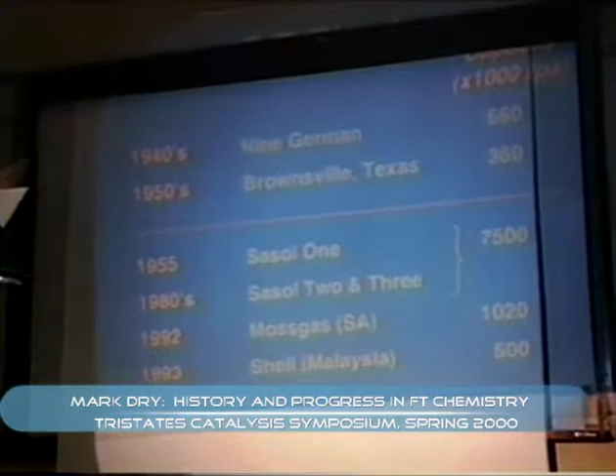Let's start off by looking at some past and present Fischer-Tropsch plants, commercial plants only. In the 1940s, we had 9 German plants operating, and in the early 50s there was a plant in Texas, Brownsville, which operated for a few years until it was shut down because the price of methane went up. The 9 German plants were very inefficient and were simply shut down after the Second World War.

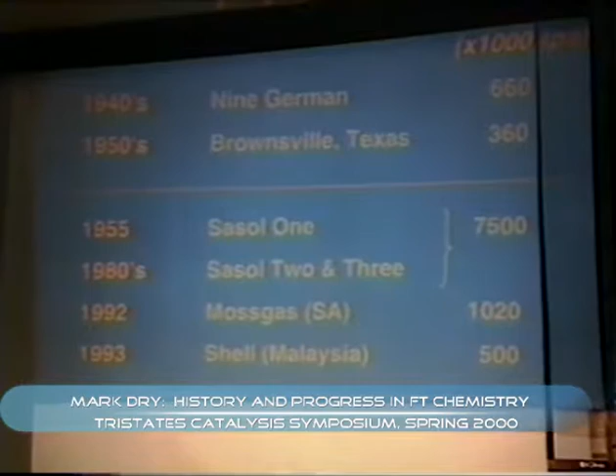Then the currently operating plants: the Sasol plants, and the Mossgas plant in South Africa. The Mossgas plant, incidentally, has nothing to do with Sasol - it's a completely independent unit; we sold them some technology, and that's all. Then, of course, we had the Shell plant in Malaysia, which operated from 1993. So those are the current plants.

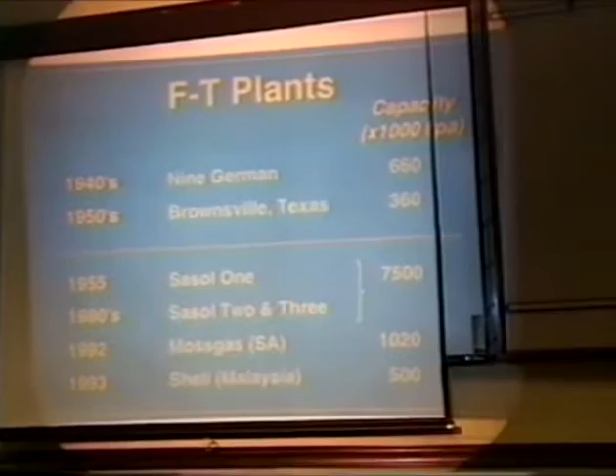If you look at the capacities, the 9 German plants jointly produced a capacity of 660 kilotons per annum, whereas the 3 Sasol plants - mainly these 2 big plants - now have a capacity of 7,500. So things have increased over the years.

Now, the decision to build a Fischer-Tropsch plant depends on several things. Local politics is very important, as is the price of crude, or the perceived price of crude, and the perceived reserves of crude oil. All these factors are involved when you decide to build a plant. It can be a pretty tricky operation.

Let me tell you about the Sasol 1 plant, the early plant constructed in the early 1950s. At that time, after the Second World War, there was a worldwide perception that crude oil reserves were running dry. There was work done in America and in Germany, all on the Fischer-Tropsch process. Based on this perception, it was predicted the price of crude would rise. Therefore, in South Africa, since we had huge coal reserves and the price of crude was expected to climb, they decided we could put up a Fischer-Tropsch plant based on coal.

It wasn't politics at that stage - politics was only in the background, because at that time there was no talk of oil embargoes. And so we built the plant.

But in the middle of this construction, while they were actually building the plant, the huge oil reserves in the Middle East were discovered, and this flattened the entire argument. The price of crude did not rise, so Sasol 1 on paper was a bit of a flop. However, what saved Sasol 1 was the fact that they made high-priced linear waxes which sold very well, and we limped along for several years.

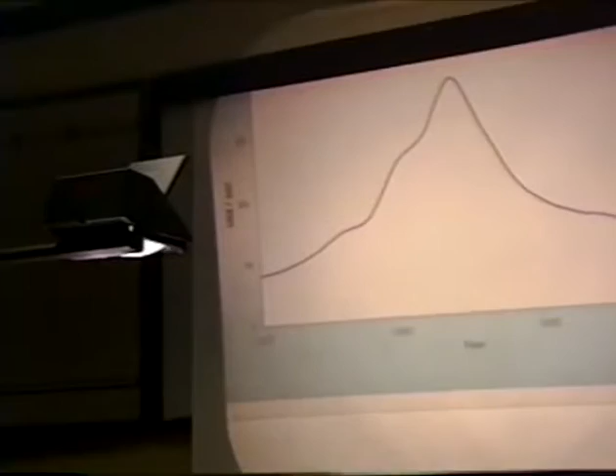Okay, but now let's look at the price of crude oil as it changes over the years - this is the vital factor. Long ago, in the Sasol 1 days, we're back here, the price of crude was $5 a barrel.

Very poor business. But in the mid-70s, as you all know, we had the Middle East oil crisis again, and the price of crude started going up, and Sasol decided by then they had developed all the technology they needed, and they decided to build new plants. As luck would have it, when those two plants came on stream, the Sasol 2 and 3, they hit the jackpot. The price of crude was over $30 a barrel. So that at least was a success story.

As you can see, the price of crude has dropped again. In 1992, the Mossgas plant was designed here, and it came on stream there. Of course, that was a bit of a flop. And the Shell plants followed soon after. So whereas the Sasol plants hit the jackpot, the Shell and the Mossgas plants did not. But look what's happened again just in the last year - it's shot up all the way to $30 a barrel, which once again has sunk.

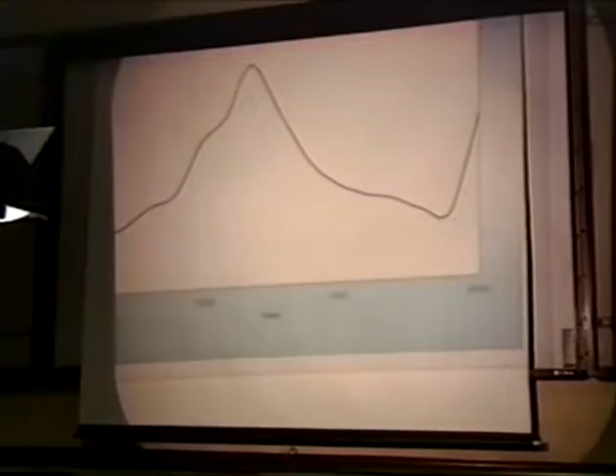What I'm trying to demonstrate is how tricky it is to decide to build or not to build a plant. Incidentally, on a personal note, it's also tricky to write about these things. In fact, a year or 18 months ago, I wrote an article saying that at the current price of crude, $10 a barrel, it was completely unviable. And by the time it was published, the damn thing was $30. You can never know.

Right, what is the cost breakdown of building a plant?

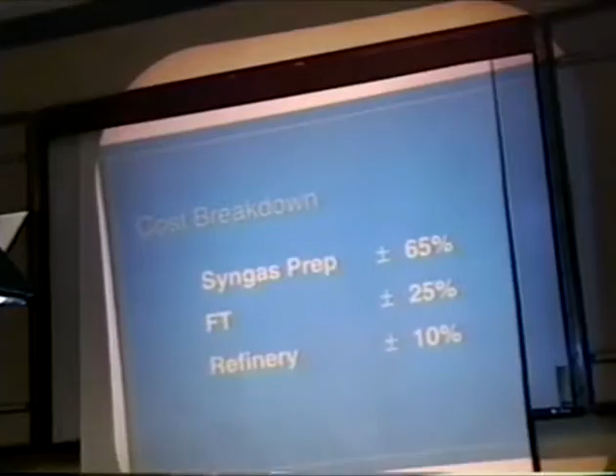The expensive business of building a plant is preparing the synthesis gas. That accounts for 65% of capital as well as running costs. The Fischer-Tropsch section itself, where you convert the synthesis gas to oils, accounts for 25%, and finally the refinery is only 10%, where you upgrade the fuels to make acceptable gasoline and diesel fuel. So you can see, besides the price of crude, the syngas is a very important aspect here.

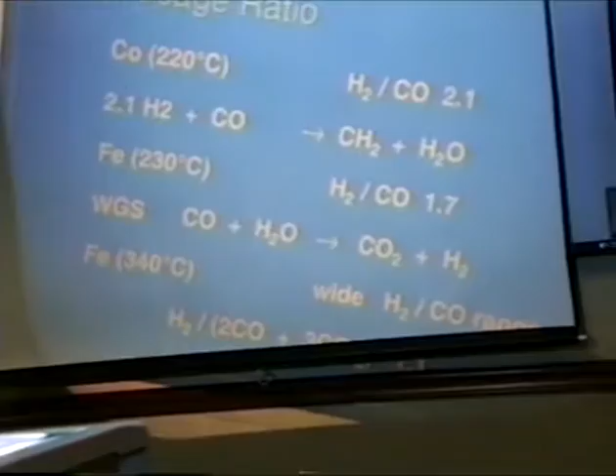Now because the syngas is so expensive, it's obviously important that you utilize it as efficiently as possible. This means the gas you feed to the reactor should match the so-called usage ratio that we just explained. Take the example of cobalt - the usage ratio is 2.1. This means 2.1 hydrogen reacts with the CO to form the building block CH2 plus a molecule of water. In other words, you need to feed this ratio so that you can utilize all the gas, because it's expensive to make.

In the case of iron catalysts operating at 230, the usage ratio is lower. This is because of the water-gas shift reaction, which consumes some of the CO you feed, reacts with some of the water, the water vapor you produce, and makes CO2 and additional hydrogen. So overall the usage ratio is 1.7. Ideally, you would like to feed a 1.7 ratio to an iron catalyst operating at low temperatures.

But at high temperatures, the water-gas shift is very reactive - it goes rapidly in both directions. So you can either make CO2 or consume CO2 via the reverse water-gas shift. In the case of the iron catalyst at high temperatures, as long as your feed gas ratio of hydrogen divided by twice CO plus 3 times CO2 is about 1.1, you can theoretically consume all the gas you feed. But bear in mind, in a practical reactor, the pass conversion isn't 100%, so in practice you either have 2 stages or a recycle operation. But in practice you can consume all the gas.

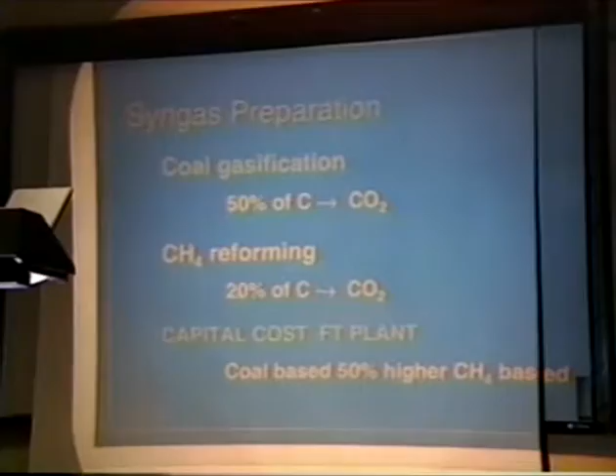Now, in the preparation of syngas, we have two choices basically: you can gasify coal or you can gasify methane. Either way, the process is highly endothermic - this means you need to burn part of your feedstock to generate the energy to drive the reactions. In the case of coal gasification, 50% of the carbon in the coal ends up as CO2 - it seems terrible. In the case of methane, it's much better - only about 20% ends up as CO2.

Now the inevitable result of this is that your carbon efficiency is poor, but as I say, that's simple chemistry - you can't get past that. The result of the coal versus methane comparison is that in the case of a coal-based plant, the capital cost is 50% higher than in the case of a methane-based plant.

We'll very rapidly give you some idea of the various options. This is the coal gasification procedure. You have coal being fed to the power plant with water, which generates steam. The rest of the coal goes to gasification, plus steam, plus oxygen, and this is where the gasification process occurs.

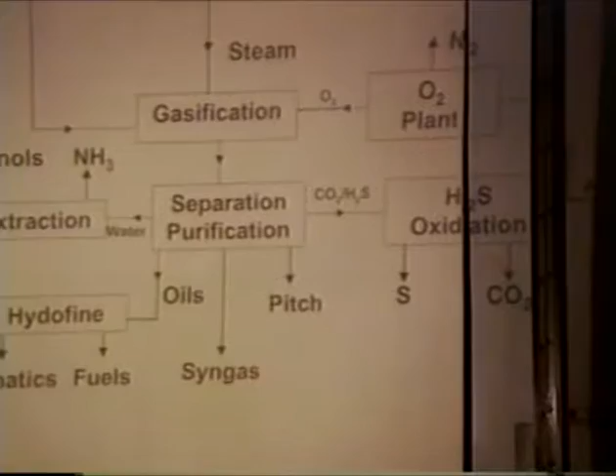Because coal is hardly a clean feedstock, you get an amazing amount of byproducts. For instance, a lot of H2S is produced, which you have to selectively oxidize. You can't let it into the atmosphere. So you make pure sulfur as a product.

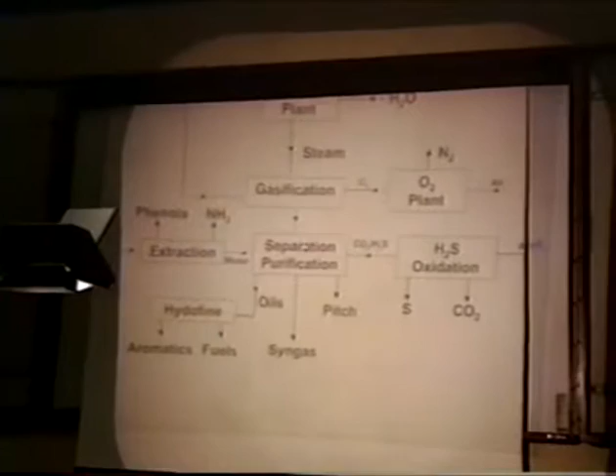You also generate a lot of pitch and aromatic oils, which are hydrofined and end up in the fuels, or you sell them as aromatic solvents. Excess steam is passed into gasification, and because of this there's a lot of water which contains ammonia and phenols. You have to purify this water, which can then go back into the cooling water system.

What I'm trying to get at here is a complex plant. There are lots of byproducts, but you can sell all of them. When you operate on a large scale, there's no problem selling these byproducts. But of course, it makes the plant very expensive to build in the first place.

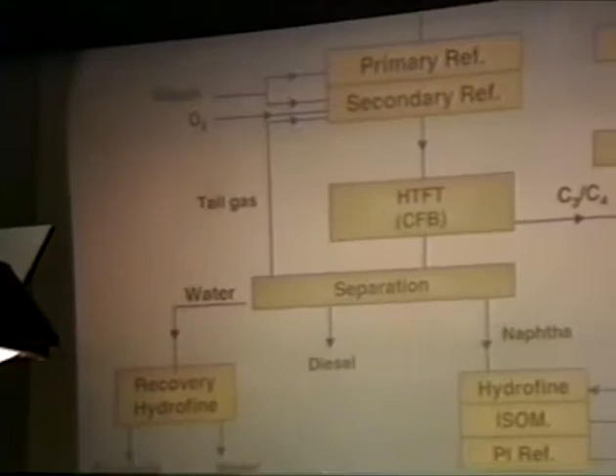Now, in the case of methane, the situation is much better. This is the flow diagram of the Mossgas plant in South Africa. They start with natural gas, with two-stage reforming, both catalytic - primary reformers, multitubular, followed by secondary reformers - and then go to the Fischer-Tropsch process. I won't go through all the plant, but you separate the products.

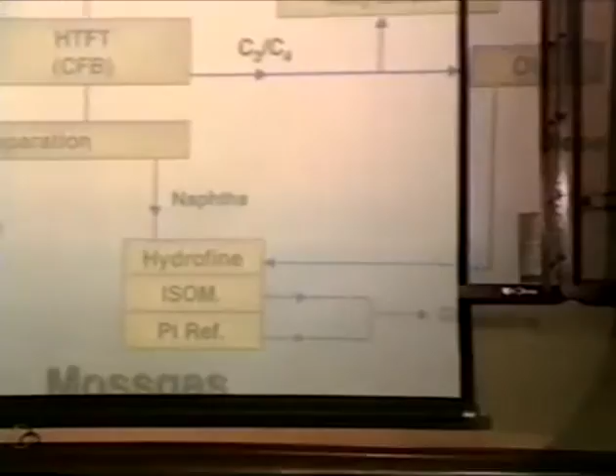The light end, which contains unconverted tail gas together with methane and the C2s and other light ends, is recycled to the secondary reformer and reconverted to syngas, so all the syngas is consumed. But obviously, it's simply natural gas reforming. There's a bit of scrubbing up too, but it's a much simpler process and therefore cheaper to produce.

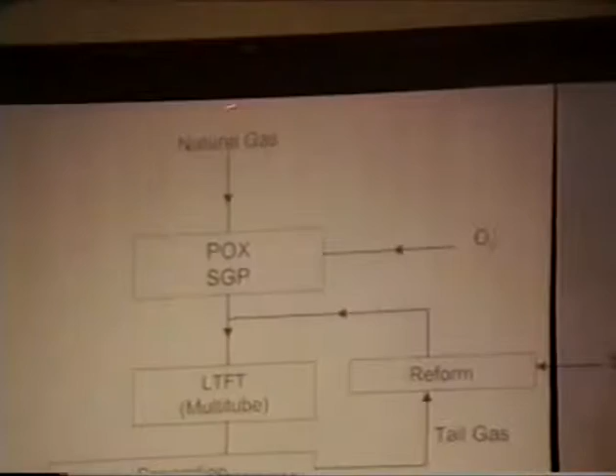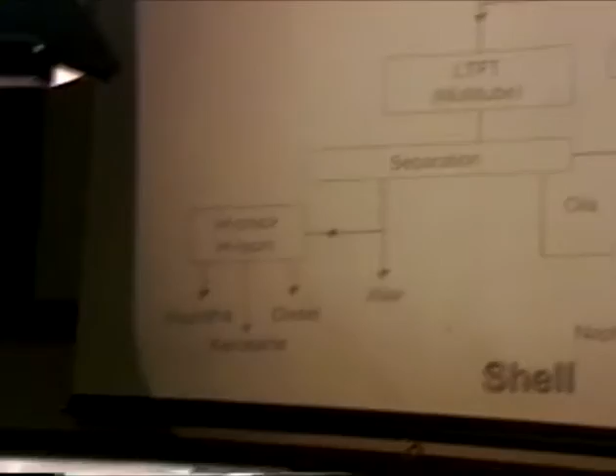The Shell plant in Malaysia is not that different from the Mossgas plant, except that their natural gas is partially oxidized. This is a non-catalytic process, high temperature partial oxidation, and it produces a low ratio gas, lower than you need in the Fischer-Tropsch process. I'll come to a moment how they fix that. So you have the partial oxidation, non-catalytic, going to the Fischer-Tropsch process, plus all the light ends.

In the Shell process, they don't want to recover C4 and lighter. All the methane and C4s are catalytically reformed, producing a higher ratio hydrogen-CO gas, so that the hydrogen-CO ratio matches what you want. You need about 2, and you get it by blending these two streams. So that's the Shell plant in Malaysia.

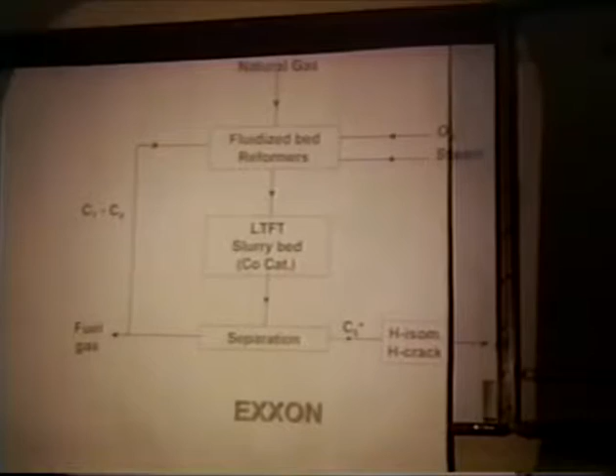Now those are all the current ways of making syngas, but just for interest, let me tell you what Exxon has proposed. They haven't got a commercial plant, but they have run a large demonstration unit. They take natural gas and use a fluidized bed catalytic reformer. The big deal about fluidized beds is that they are very efficient in terms of gas throughput, with very good heat exchange, so you can make a huge amount of gas in the same size reactor.

Because of that, the cost of producing syngas, which is the most expensive part, is apparently lowered considerably. But a commercial plant has yet to appear.

Now, even these figures can change. Let me take you back to the 1970s, when there was a perception that methane was running out. Because Sasol had coal-based synthesis gas, we were asked to run pilot plant tests to convert this gas into methane over a standard nickel methanation catalyst. The runs were very successful - we showed that the gas was okay.

And so Lurgi, who was involved with this, designed a plant here in the States - I think it's Great Plains. The plant operated very well, etc. But of course, methane is plentiful now, so that's another case where things came and things went.

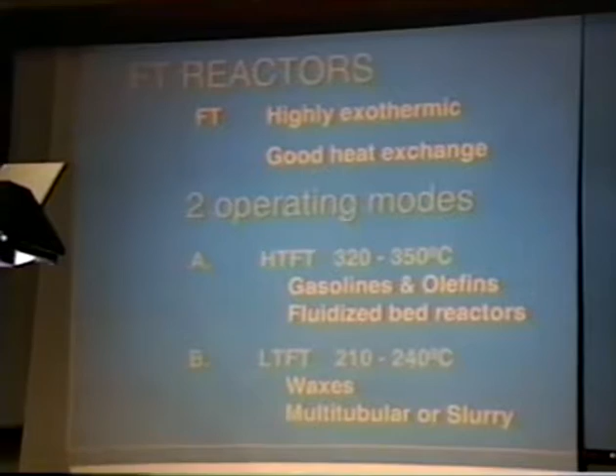In the high temperature Fischer-Tropsch process, we are out to make gasoline and linear olefins - that's the objective, and the best reactors to use are fluidized bed reactors, which I'll be describing. In the low temperature Fischer-Tropsch process, the objective is to make waxes, and the best reactors are multitubular, or preferably the so-called slurry reactors.

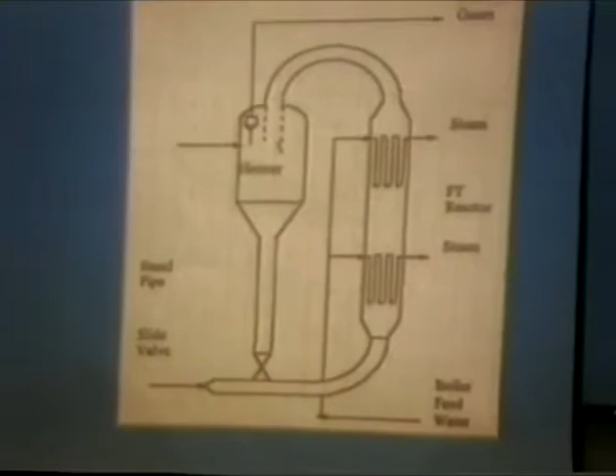Now this is what we call the circulating fluidized bed reactor, or CFB. The idea is you have finely divided iron-based catalyst, with the dense phase fluidized catalyst moving down the standpipe, controlled by a valve. The catalyst is picked up by the incoming gas and swept into the reaction section. The whole mixture is conveyed to a wider section where the linear velocity of the gas drops, so the catalyst is no longer carried and drops down, while the gas and product exit through the cyclones. That's the circulating fluidized bed reactor.

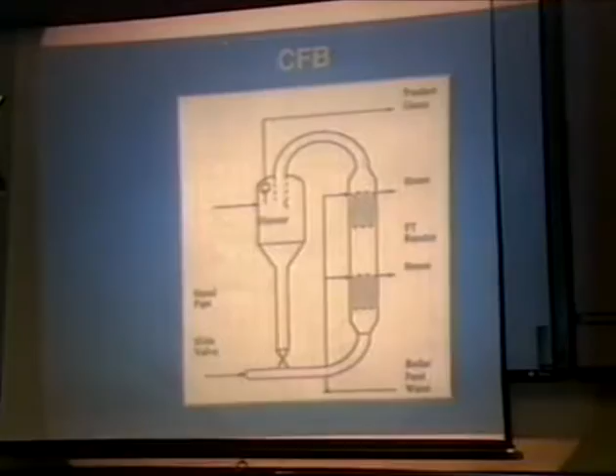These reactors were the original ones built at Sasol 1, and they've operated very well for over 30 years. In fact, the Mossgas reactors are simply bigger versions of these. There's nothing wrong with those reactors, but they are very expensive to operate and build because they're huge.

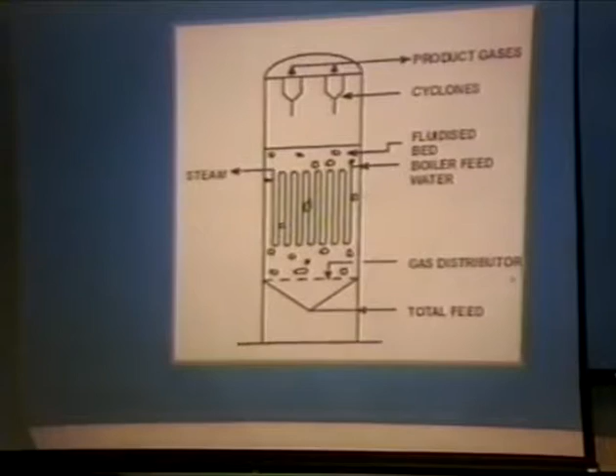A much better option is the so-called fixed fluidized bed reactor. This is just a standard fluidized bed, as you probably know. The feed comes into the bottom through specially designed gas distributors, creating an ebullient, fast fluidized bed, but it's stationary — it's bubbling around but doesn't go anywhere. It's a much wider reactor, so the linear velocity is lower. This makes it a much cheaper and simpler reactor to build.

Now you can say, well, why on earth didn't Sasol put those up in the first place in the 1950s? Let's talk about the development of the FFB.

I've mentioned the 1950 Brownsville plant in Texas ran a Fischer-Tropsch plant. They were, in fact, fixed fluidized bed reactors, about 5 meters ID. Independently of that, Sasol had already decided to build the CFBs — I guess Kellogg's were better salesmen than the other people. So Sasol built the circulating fluidized bed reactors.

Brownsville were operating these, and rumors came back that the Brownsville plant was having fluidization problems. That was true, but they solved the problem. When we heard they had problems, we were of course very pleased — we'd chosen the right reactors.

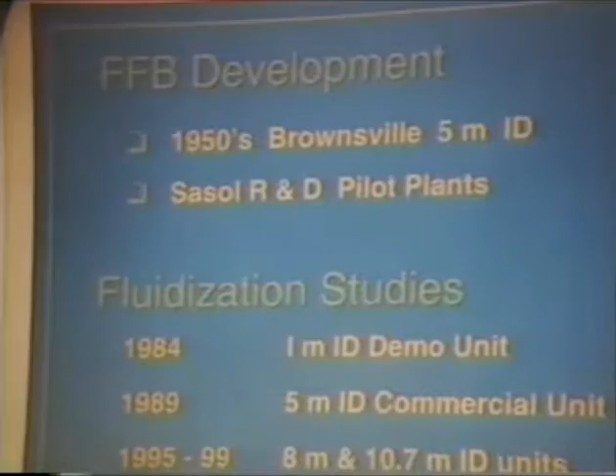As it happens, the R&D pilot plants we used at Sasol to develop new catalysts and investigate process variables were fixed fluidized beds. Admittedly just pilot plants, but they operated very well, and we started asking ourselves, why not fixed fluidized beds? So we went into fluidization studies based on the fact that Brownsville appeared to have had problems.

We studied fluidization together with Badger, and in '84 we built a 1 meter ID demonstration unit, which operated very well. In '89 we put up a 5 meter ID commercial unit — note, the same size as Brownsville. Between '95 and '99, all the large circulating fluidized bed reactors at the Sasol 2 and 3 plants were replaced by large fixed fluidized beds. So, typically, from 1950 it took 35 years before we were back to them.

But they operated very well. We're very pleased with them.

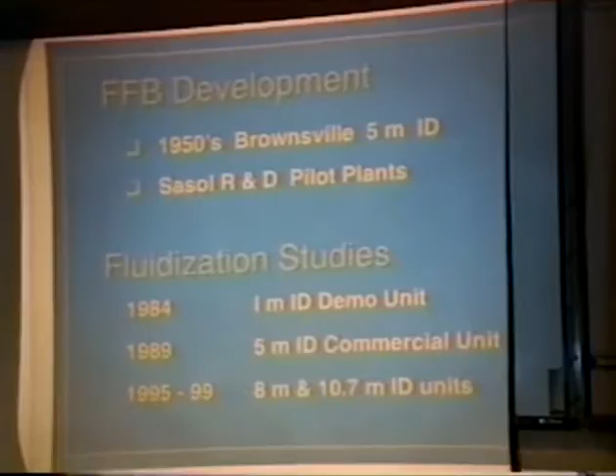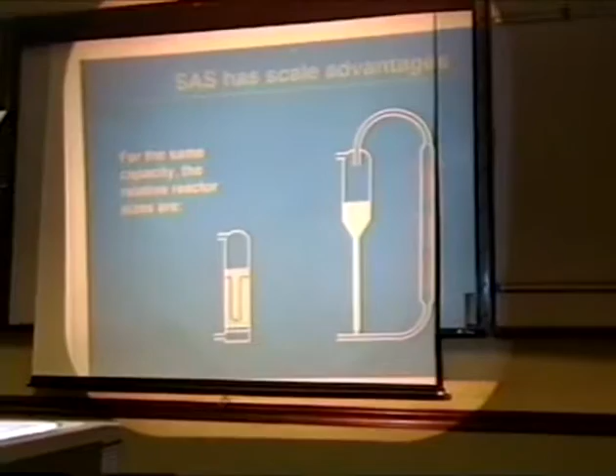Now this gives you some idea — this is to the same scale. This is the fixed fluidized bed, and that's the circulating fluidized bed, with the same production capacity. You can see why this reactor is obviously a better deal price-wise — it's much cheaper to build. So just to rapidly summarize, let's take a couple of key points here.

The fixed fluidized bed is 60% cheaper to build because it's so much smaller. It has lower operating costs because the differential pressure over the bed is much lower, so you don't spend as much energy pumping the gas around. The maintenance costs are also lower, again because of the lower linear velocity.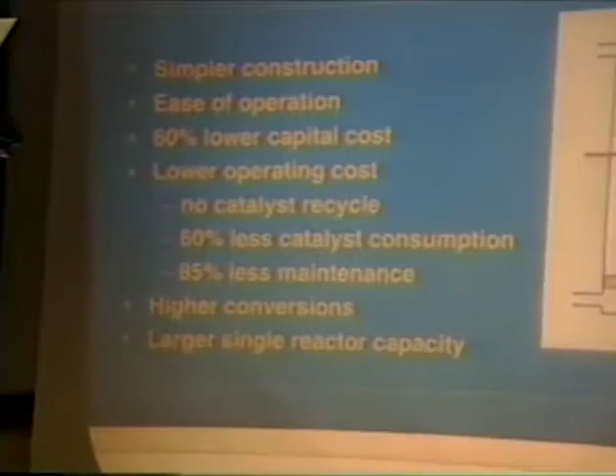In the circulating fluidized bed, you have abrasive iron catalyst traveling at meters per second, and in certain parts of the reactor you need ceramic lining and constant maintenance. In these fixed fluidized bed reactors, there's no need for that — you get much longer runs, so in general they are much better reactors.

And of course they have higher conversions as well, so that's lots of bonuses there.

That's what the reactor looks like. Can't see much, but it's just a great big empty tube full of heat exchangers.

Right, so much for the high temperature Fischer-Tropsch. Let's now have a look at the low temperature Fischer-Tropsch, where the objective is the production of waxes.

The original Sasol reactors at Sasol 1, built in the mid-1950s, were multi-tubular reactors. Those reactors are still there and they're still running. There's nothing wrong with that.

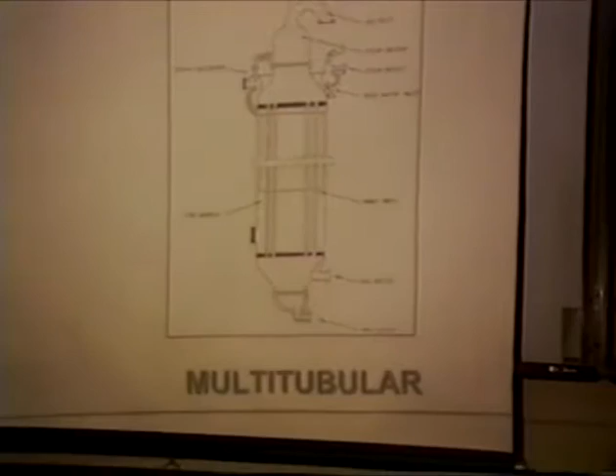But they're expensive to build because they consist of thousands of tubes - in the case of the Sasol reactors, about 13 meters long and about 2-inch ID, with about 2,000 tubes per reactor. It's like a great big heat exchanger with catalyst in the tubes in the middle. So you have catalyst in the tubes, the gas flowing over, and water jackets around to control the temperature.

The Shell reactors in Malaysia are the same type, but because they use cobalt catalyst, their tube diameters need to be much narrower - I guess around 1 inch - and they're much bigger reactors. So they're still very expensive to build. But the point I want to make is these are expensive reactors to construct, but they operate very well.

The alternative is, once again, a fluidized type reactor. I just call it a slurry reactor. It's actually a 3-phase reactor. In this case, you have the finely divided catalyst suspended in liquid wax under the synthesis conditions. So you're passing the syngas through distributor plates, and then you just have a fluidized bed. And you can ask, how come these reactors, after all, were known...

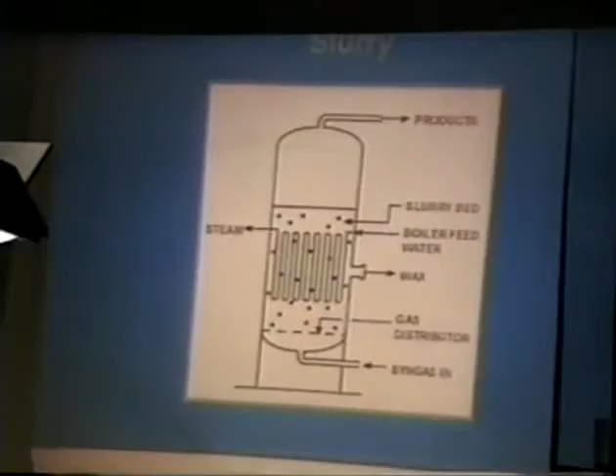German scientist Kölbel played around with this reactor soon after the war. How come it took us so long to build these reactors? The main reason is that because you have finely divided catalyst suspended in wax, and you are making wax, you need a very efficient system to separate the catalyst from the wax. After all, you want to end up with pure white wax, which you do. But the filtration, or separation system rather, is a tricky one, and it took us several years to get that operating. But now it is operating, and it's working very well, at Sasol.

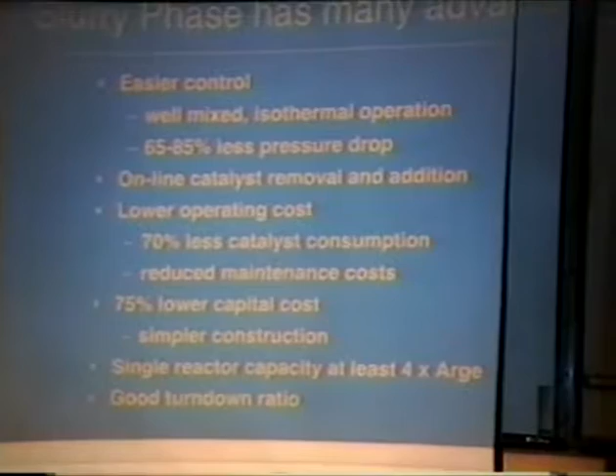And what are the advantages of the slurry reactor over the multi-tubular reactor? I mentioned the cost is 75% cheaper to build. Just think of those thousands of tubes which have to be welded into these massive plates and things - it's a very expensive reactor. Often they just say the weight of the reactor is proportional to its cost.

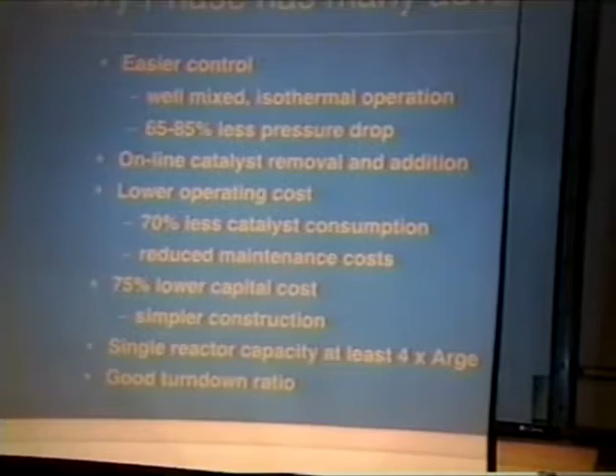A big advantage of the slurry phase reactor is you can run longer times. This is because, with the fluidized bed, you can remove catalyst and add catalyst online, so you don't have to shut down. In the case of a fixed bed, it's a massive performance - you have to shut the reactor down, open it up, get rid of the catalyst, recharge, and that takes you several days.

And this is about the main point. Of course, as I said, it's cheaper online, and also the operating costs are lower, once again because the differential pressure of the reactor is low. It's a fluidized bed - you don't have to force gas through long, narrow pipes filled with catalyst.

Okay, let's talk about the Fischer-Tropsch reaction itself. We've spoken about the hardware, and let's look inside - let's have a look at the chemistry and the kinetics.

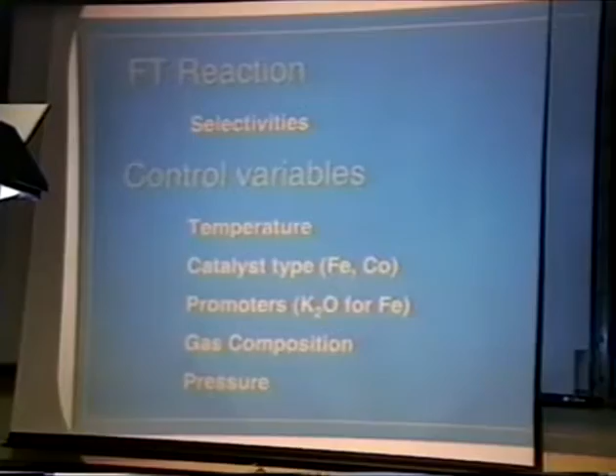I've emphasized that the cost of synthesis gas is very high. So once again, it's important that the selectivity of the process must be such that you maximize the amount of product you want to make. You want to make gasoline, you want to make a lot of gasoline, not just a little. You don't want to make methane, because that's what you're starting with most of the time. And the Fischer-Tropsch process, of course, makes a whole wide range of products, so selectivity is very important.

And how do you control selectivity? The key factors are these: temperature is an obvious one - the higher the temperature, the more methane you make, and that's a bad direction. The catalyst type is important - you can either use iron or cobalt catalyst. Promoters are important in the case of iron - the alkali K2O is of vital importance, in fact it is the key promoter.

For both cobalt and iron, gas composition and pressure also play a role. Those are the variables that influence the selectivity of the process. Let's kick off by looking at the options you have for catalysts.

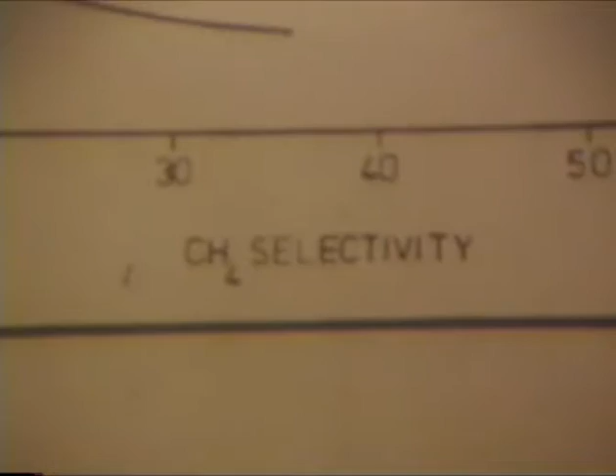For the high temperature Fischer-Tropsch process, I've plotted selectivity of methane, the undesired product, against some other cuts. Here's the gasoline, which peaks just over 40, and then as methane goes up, it falls off. There's the C3, and there's the distillate or diesel cut. You can see whatever you do - mess around with the catalyst, mess around with temperature - somewhere these parts will always fall into place.

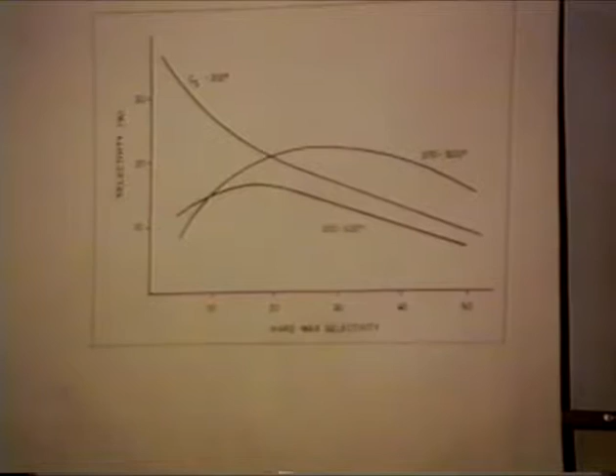Now, how come we have these interrelationships, so neat? It's not higgledy-piggledy - there's some organization in the process somewhere. And this seems to be tied up with the process of chain growth. Let me just spend a minute here.

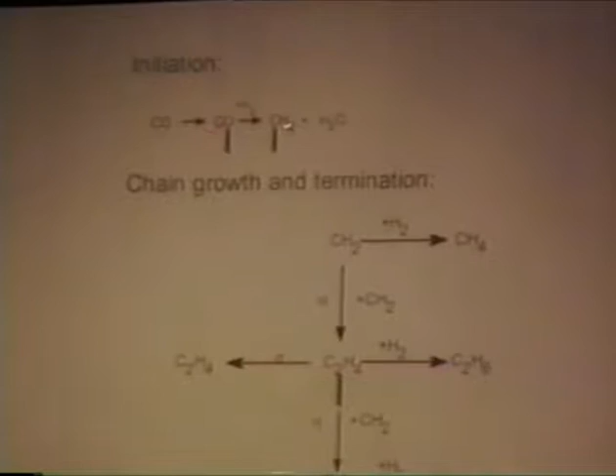You have carbon monoxide adsorbing on the catalyst, and then somehow - I'm not going to go into this - you convert this CO to a CH2 unit, which you can consider the building block of the process. It's polymerization after that. You have the CH2 unit, which can either be hydrogenated to methane, or link up with another CH2 unit, with probability alpha, to form a C2 unit.

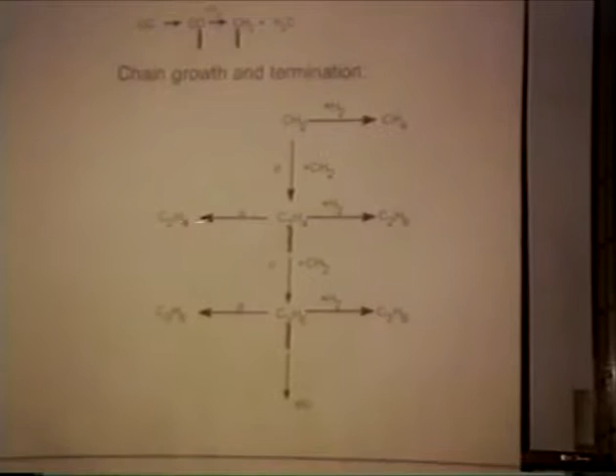Now the C2 unit has three options: it can either be hydrogenated to form ethane, or simply desorb to form ethylene, or it can once again link up with another CH2 unit with probability alpha to form the C3 unit, and so on. So you can consider it a polymerization process of CH2 units.

Now, if it's as simple as that - just a matter of probability of chain growth - you can sit down and calculate the probabilities. You don't need to go through the whole exercise. If you assume the probability changes, then at each probability you can calculate a product selectivity, and this is, in fact, a pure calculation.

You can see I've plotted probability from 0 to 1 against selectivity. Methane, typically, if the probability of chain growth is 0, obviously you only make methane. Then as the probability increases, the methane disappears, and at the other extreme, the hard waxes appear. All other cuts in between methane and the very heavy waxes go through peaks, and you can see the gasoline peaks around the mid-40s, which matches practice.

The distillate or diesel fuel peaks around just about 20, and once again that matches the actual observed phenomena. The only obvious exceptions are that the C2 in practice is lower than the C2 predicted, and the methane is usually a bit higher. But otherwise, there's a surprisingly good correlation between the simple calculated value and the actual values observed in practice.

Now, I'm putting this back up because I want to emphasize that there's not a mechanism. This is simply a polymerization procedure, if you wish. When I'm talking about mechanism, I mean this.

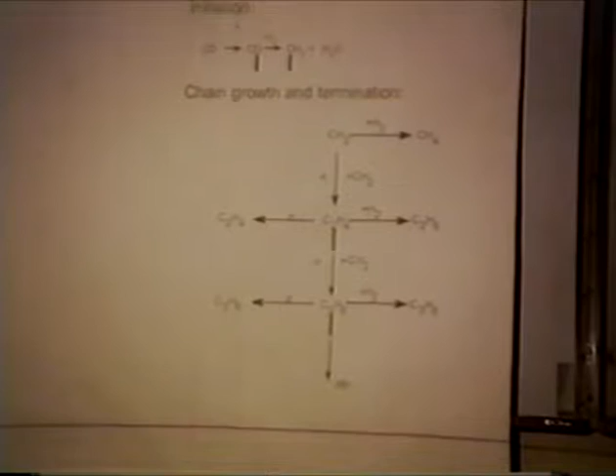How exactly does that CO molecule, on an atomic scale, convert to CH2? What exactly are the process steps? Does the CO dissociate and then this carbon reacts with hydrogen? Or do you first get an intermediate hydroxy process, which then ends up with CH2 with a further hydrogenation step? What is the actual nature of these intermediate complexes? And how exactly do they desorb? What is their particular chemical process involved?

This is what I mean by the basic mechanism. And there's an awful lot of argument about these mechanisms. People have been arguing about them since Fischer-Tropsch started in the 1920s. It's very interesting, but I keep asking myself, is there any point in these arguments? Because I've yet to see anyone decide: right, we have 5 mechanisms, we've made our decision, mechanism B is the right mechanism. Based on this knowledge, we are now going to build a catalyst that has a better activity, a better selectivity, and a longer life. I'm still waiting for that.

Hopefully I'm wrong, but in the meantime, it's very interesting arguing about mechanisms. Now, coming back to the practical side of things, the Fischer-Tropsch plant is normally built at a fixed temperature and a fixed pressure, because it has to match the gas pressures and things like that. So the temperature and pressure have been predetermined virtually.

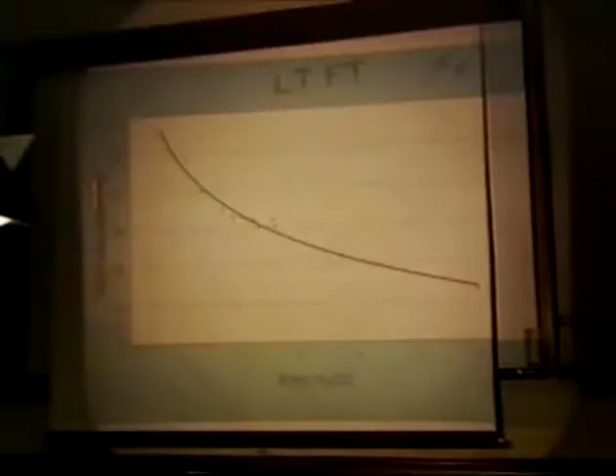This is the case for the low temperature Fischer-Tropsch process, where we're interested in making hard wax as the prime product. Here I've plotted simply the ratio of hydrogen to CO of the gas entering the reactor.

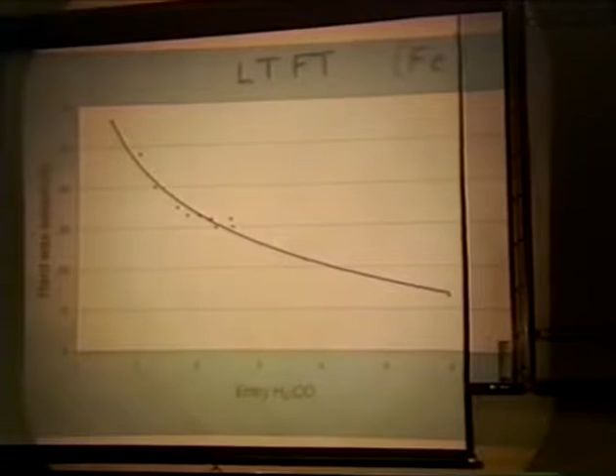You can see there's a nice plot here. The pressure has been varied from 5 bar all the way to 60 bar. We've added water in some cases, in others we've added CO2, we've varied the recycle ratio — the tail gas recycled back to the fresh feed — and we've varied catalyst loadings, so the space velocity has been changed. But in spite of all these variables, at a fixed temperature with a fixed catalyst, all you need to know is the ratio of hydrogen to CO of the gas entering the reactor. It's a clear-cut interrelation.

That's for iron catalyst. For cobalt catalyst, incidentally, it's more or less the same, except that up to about 20 atmospheres, the methane decreases with increase in pressure. The iron catalyst, however, is independent of pressure in the low temperature process.

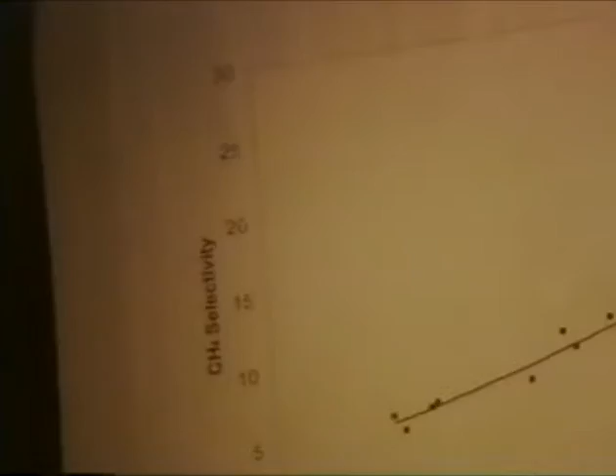For the high temperature process, it's much more complex. Here I've used methane as a parameter because this is the undesired product, and this is the factor I'm using at the gas entrance. Now it looks much more complex. If you take the simple hydrogen to CO ratio of the gas entering the reactor, it's a very poor correlation — in fact there is virtually no correlation.

Once again, here we varied the pressure from 10 bar all the way to 80 bar. We've added water, we've added CO2, changed the recycle ratio, changed the gas loadings and everything. You can see this factor, for what it's worth, seems to give a reasonable correlation — this is the entrance gas composition. Because the hydrogen is to the power 0.25 (we could make it 0.5, it doesn't really matter much, it's a fractional power), and the CO is to the power 1, you can see the pressure has an effect. In fact, if you increase the pressure in the high temperature process, the selectivity does change. This does not happen in the low temperature process.

So this is the gas factor controlling selectivity. These are purely practical things. We can rationalize them — you can ask, what's CO2 doing there?

Even though CO2 doesn't influence the selectivity directly, if you keep all other parameters fixed and vary the CO2, you don't see much change. But yet you've got CO2 stuck in it. Why? That's because of the water-gas shift reaction, which will shift things one way or the other. So CO2 has an indirect effect via the water-gas shift, and that's why it's stuck in there.

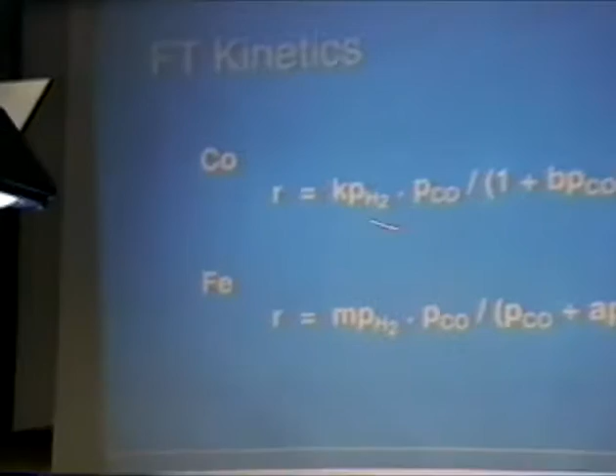Let's look at the kinetics. I'm using two equations that are pretty well accepted by a lot of people. For cobalt, we have an equation that only contains partial pressure of hydrogen and partial pressure of CO, only two factors involved. In the case of iron, you again have the CO and hydrogen partial pressure, but you also have a factor for the water vapor partial pressure.

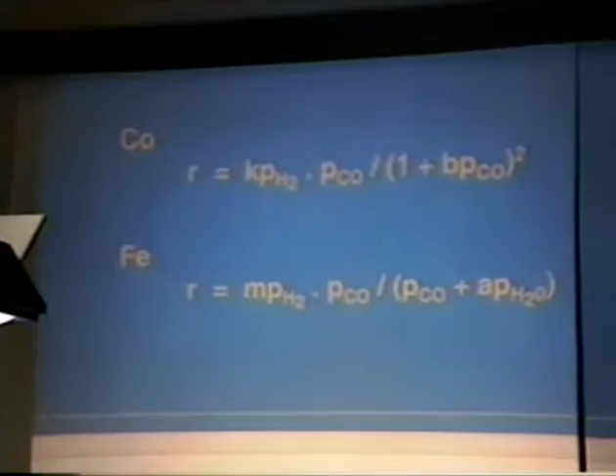Now this fact that there's a water vapor partial pressure here and nothing there makes a tremendous difference. Water is a product of the synthesis, so as you proceed through the reactor you're generating water, the partial pressure of water is increasing, and this means the rate of reaction is going to decrease because of the buildup of water in the system. This will not happen theoretically for cobalt catalysts, according to this reaction. Now that makes a huge difference in the activity.

Let me show you what I've done. I've had to do a bit of hocus-pocus matching here, but the point is you can make different catalysts with different activities. To make the comparison valid, just look at the top blue line, which is the cobalt catalyst operating at about 31 atmospheres, and this is the iron catalyst operating at the same pressure. Down here at low conversion, I've deliberately chosen these parameters.

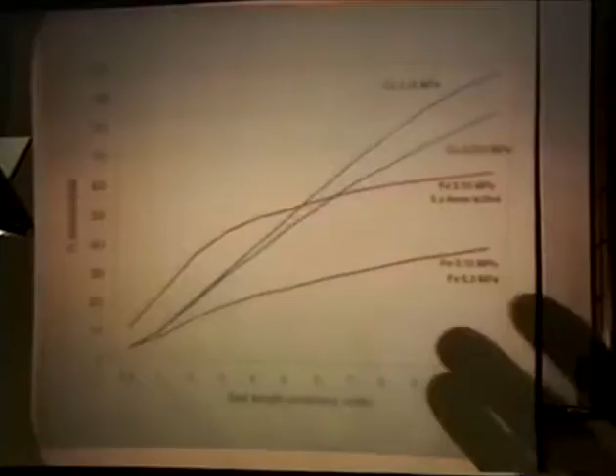The K value there and the M value here—I've adjusted them so that at low conversion you have the same activity. In other words, it's like operating the two catalysts in a differential reactor where the conversion is very low, and then the activity is the same. You produce the same amount of product. So in other words, I'm making the two catalysts as if they have identical activity.

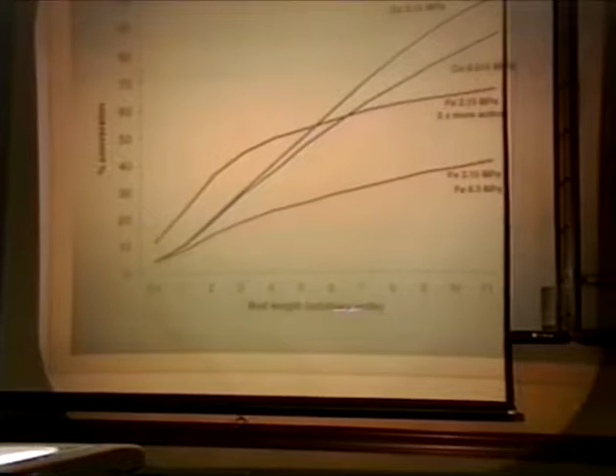Now let's see what happens afterwards. As you build up water vapor pressure, as you proceed down the bed length—these are arbitrary units, don't worry about the inches or feet or yards—the water vapor increases and the rate of the iron sort of bends over. In the case of cobalt, it carries on happily until very high conversion before it starts tipping over.

And you can see, for instance, if you want to operate in this zone, there's a huge difference up here. The cobalt catalyst is capable intrinsically of converting, or being much more reactive, than iron. There's no doubt about it—cobalt is a more active catalyst. One of the big reasons is it's less sensitive to the water vapor pressure.

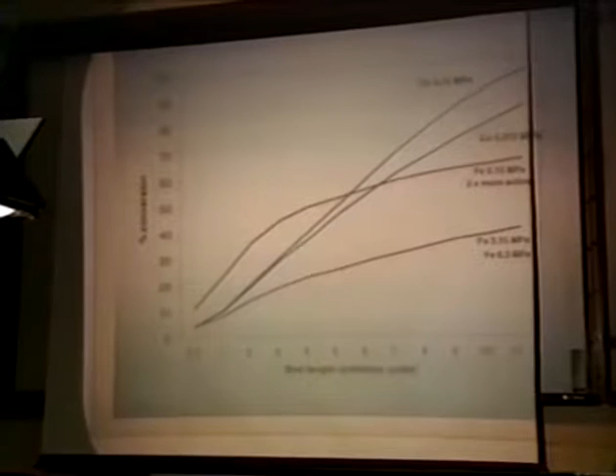But this case here is the ideal case, I want to emphasize this. This assumes no water vapor effect. There's a lot of work that's been done, including at the CAER, that shows water does depress the activity, because cobalt is so expensive you have to minimize the loading of cobalt on your carrier. So you put as little cobalt as possible, say on alumina, and to get decent activity you need high dispersion. This inevitably means very small crystals of cobalt.

But very small crystals of cobalt have different thermodynamics from bulk metal, so the small crystals oxidize. You effectively knock out the very small crystals, so they are not active. In practice, this blue line is the optimum case where all the crystals are just the right size so they don't oxidize, but that's not likely to happen. So I'd guess the true blue line would probably run somewhere more like there. But nevertheless, it will still outperform the iron catalyst.

Let's have a quick comparison between iron and cobalt. All the Sasol commercial units use iron—it's always been like that. But the new Shell plant uses cobalt catalyst, and the new slurry reactors designed for proposed plants are all based on cobalt. Let's just quickly compare them.

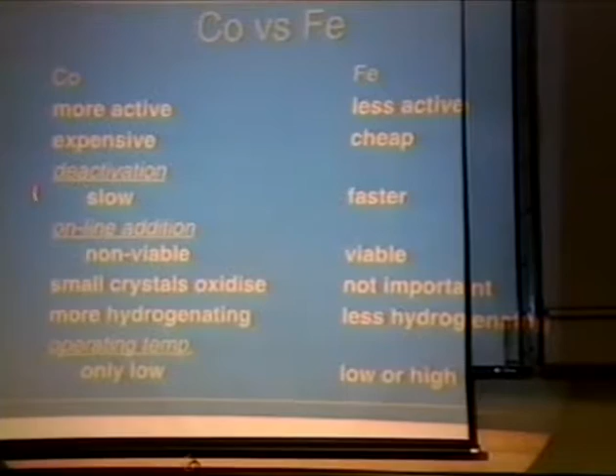Cobalt is much more expensive, but of course it's more active, so that's fine. Cobalt does deactivate, like any other catalyst, but fairly slowly. Iron deactivates faster, but it doesn't really matter because iron is so cheap you can keep charging fresh catalyst into the reactor and keep going at a high conversion.

That makes online addition viable for iron, but less viable for cobalt. I've mentioned that cobalt has a problem of small crystals that oxidize, so it's very important to optimize your particle size on the carrier. For iron, that's not all that important because it's so cheap.

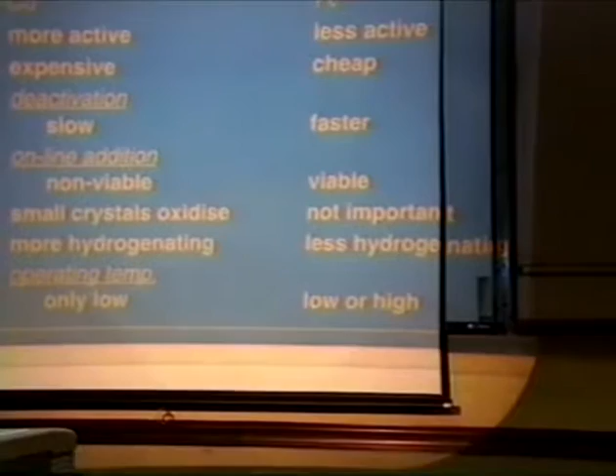You have a huge surface area. You can use virtually pure iron in the catalyst, and you have a big surface area, and you oxidize, so what? You've got plenty of area to spare.

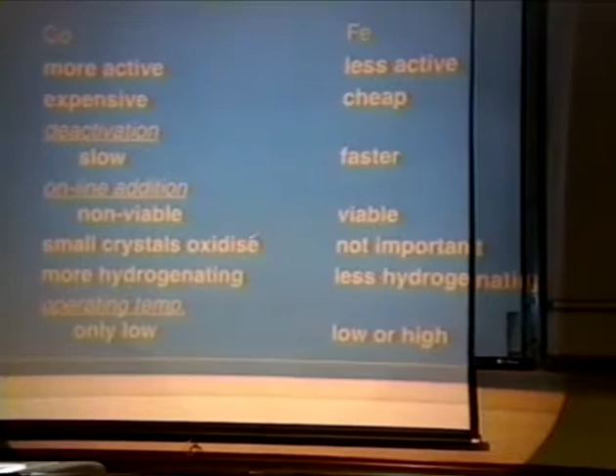Cobalt is more hydrogenating. This means it makes more methane. Because of that, you can only operate at low temperatures. As soon as you increase the temperature, the methane goes sky high. Iron, being less hydrogenating, means you make more olefins, which is nice, but it also means you can operate either at low or high temperatures. So iron has more versatility, but if you're interested in making long chain paraffinic waxes, cobalt is fine.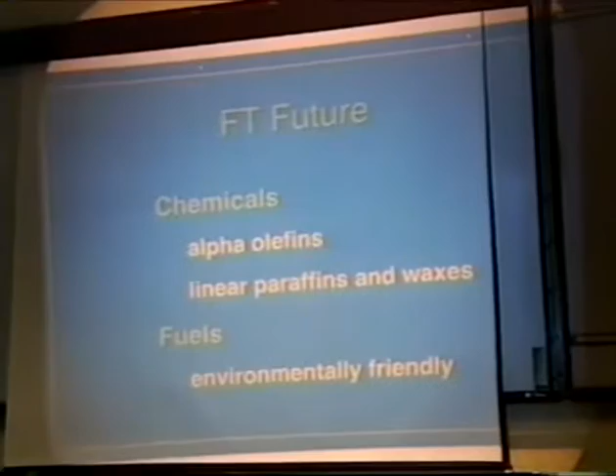What about the future of Fischer-Tropsch? After all, the Sasol plants were built to make fuels. But since the price of crude doesn't look like it's going to stay high, for many years Sasol has been moving towards chemicals. I think currently about 50% of the income comes from chemicals, no longer from fuels.

The big deal about chemicals is that the Fischer-Tropsch process makes linear alpha olefins, which is a very valuable chemical. The paraffins and waxes are also linear, which sell as chemicals. Now, the advantage of Fischer-Tropsch fuels is that they are environmentally friendly, which is a popular thing these days.

Let's have a quick look at chemicals. We don't want to spend too much time here. Take the high temperature Fischer-Tropsch process. Let's compare two cuts, the C6 cut and the C10 cut, just by way of example. The linear alpha olefins are 58% in the C6 cut, and the monomethyl 1-alkenes, still alpha olefins but with one methyl branch, are 24%.

You can extract these linear alpha olefins quite easily by distillation and sell them, and they get co-polymerized with polyethylene to make various grades of polyethylene. Sasol is selling virtually all its C6 linear alpha olefins at very high prices. So that's good business now.

Let's take the C10 cut, which is now being utilized as well. It contains 38% linear alpha olefins and 20% monomethyl 1-alkenes. In other words, when you add them together, you've got 58% alpha olefins, essentially straight chain. These you can convert in the so-called oxo process, the hydroformylation, to produce virtually linear alcohols, which are used in the production of biodegradable detergents. So once again, you're in the chemical business.

Quick look at the fuels. I don't want to spend too much time on gasoline because, remember, the Fischer-Tropsch process predominantly makes linear products, and this is bad news for gasoline. For high octane rating, you need branched products, you need aromatics. Even in a high temperature process, you do make some aromatics, but there's very little benzene - about 0.1% benzene, and total aromatics are 5%.

So that sounds good, low aromatics, but of course the alkenes are far too high. They have to be hydrogenated, isomerized, the heavy naphtha has to be platinum reformed, and then you need to add some ether to boost octane number to make an acceptable, environmentally acceptable gasoline. It's a big performance to make. You can do it, Sasol does do it, but it's not cheap because you have to go through all these downstream production processes.

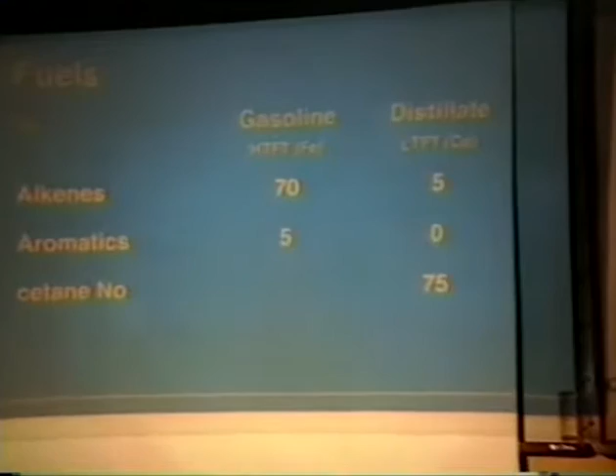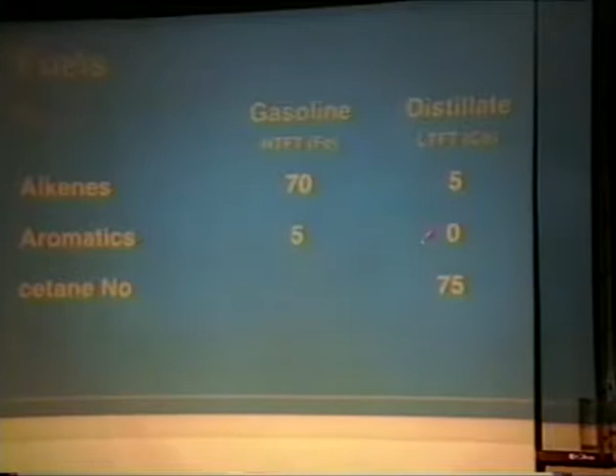A much better bet seems to be the production of distillate or diesel fuel. Take the low temperature Fischer-Tropsch process, operating the slurry bed with cobalt. The total olefins will be only about 5%, so it needs very little hydrotreating to clean it up. There are no aromatics whatsoever in that diesel cut, and the cetane number is a beautiful 75. Remember, you only need about 45 in the marketplace.

Of course, in general, all fuels in the Fischer-Tropsch process are free of sulfur and nitrogen, so that remains a plus in any event.

Now, I want to say, because the diesel is a much better option, let's just concentrate on how do you make high-quality diesel from natural gas.

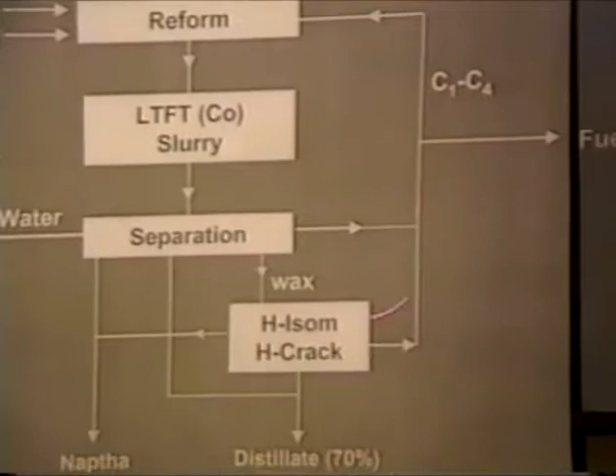Take the natural gas, you reform it catalytically. I've been through that. You make your syngas, you pass it through a cobalt slurry reactor, and you operate this reactor at low temperatures deliberately to maximize wax production. You then take the wax and you hydroisomerize, hydrocrack it to produce distillate.

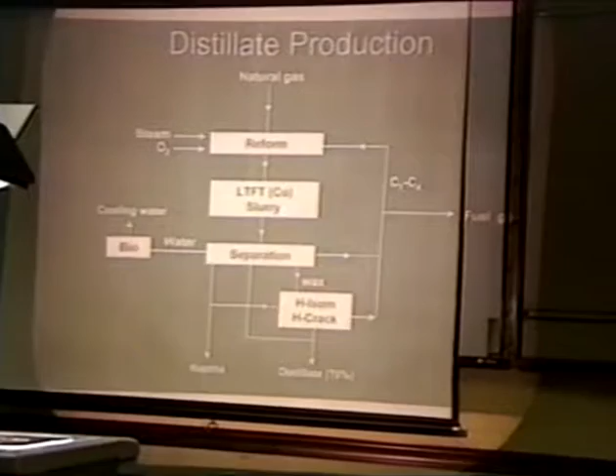You do produce quite a bit of naphtha, but that naphtha is useless as a gasoline because it's essentially straight chain, but it's a beautiful feedstock for thermal cracking to ethylene. You get very high yields of ethylene from it. And then, of course, if you need a purge somewhere, the light ends can be sent off to fuel gas.

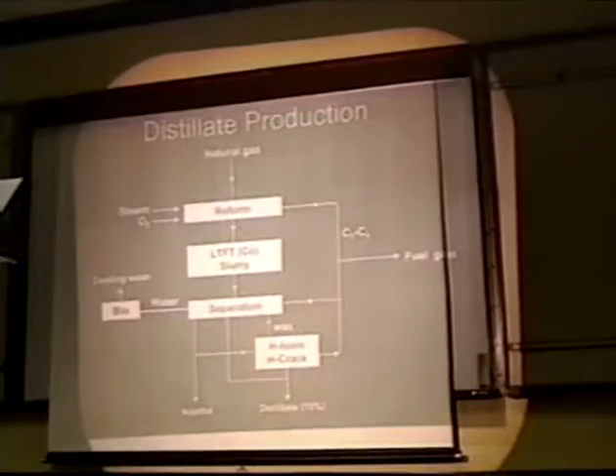Now, this process, in fact, the Shell plant originally built their plant to produce wax, and then they cottoned onto the fact that you could produce the high-quality distillate. So they are operating their plant in two modes. Partly they're making wax, and the other section they are hydrocracking the wax to make distillate.

Now, here's another case where things have reappeared after 25, 30 years. This whole concept is not new. Let me give you a bit of history.

In the early 70s, we at Sasol, in the research department, investigated wax hydrocracking. We found that using the common catalyst like nickel moly on amorphous alumina, which we just took off the shelf as it were, we studied the hydrocracking. We found we could produce a product that was 80% distillate, 15% naphtha, and about 5% light ends.

Now this is not surprising. If you simply do a simple calculation of beta scission cracking, that's what you get. And of course, all the stuff heavier than distillate, because it's mild conditions, you don't get complete conversion. You recycle the heavier cut, and overall, you get 80% diesel. And it has a cetane number of close to 70. So it's excellent diesel stock.

Now, taking you back, we knew this in the 1970s. In the mid-70s, Sasol had to decide—they were busy building Sasol 2 when they realized they wanted to double the capacity, so they had to decide what Sasol 3 would look like. And we very boldly, maybe stupidly, suggested, let's build a hydrocracking plant.

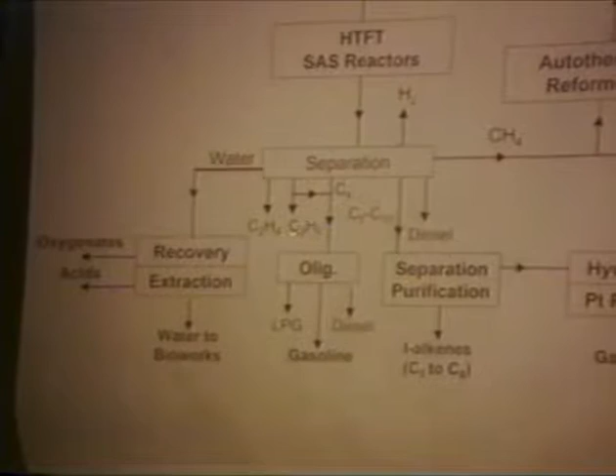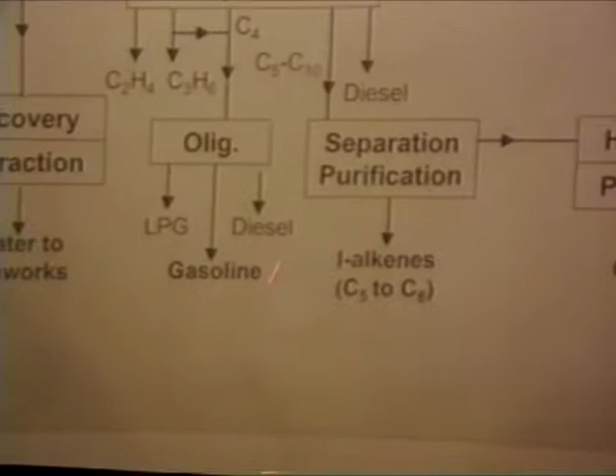So the gasoline is highly branched but also highly olefinic. The octane rating and all that is fine. But the naphtha, now being linear, having extracted the C5 to C8 linear alkenes which you sell as chemicals, the rest is still pretty poor. It's isomerized and then hydrated to iso alcohols. Sasol doesn't isomerize the light end.

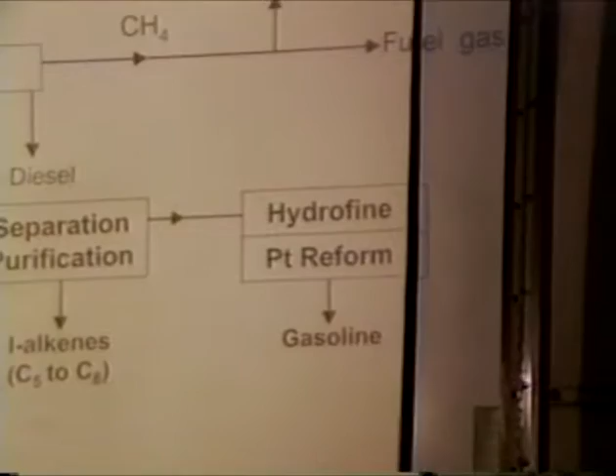Mossgas does - they isomerize the C5, C6, and also make alkylate. But at Sasol, they simply take the remaining heavy naphtha and hydrofine it to get rid of the olefins and alcohols, then platinum reform to make gasoline. They also had MTBE and stuff like that. So you do end up with high octane gasoline, but it's quite a performance to make.

Incidentally, it depends on how things are in the world too. Yes, sure. But what I'm getting at is, in general, you can make acceptable gasoline.

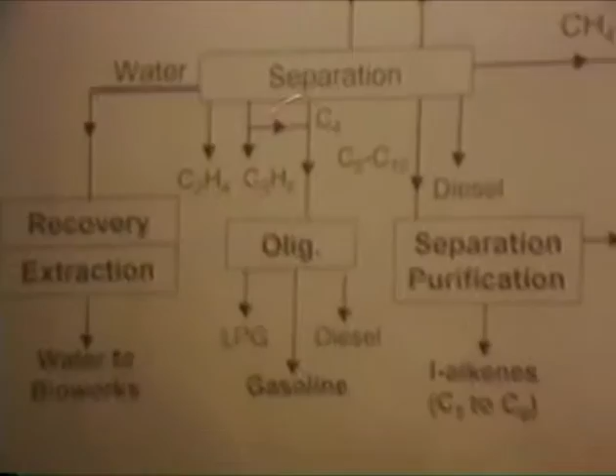Well, they do. Can you vary that a little more so you push the molecular weight distribution even further to the right? Well, the trouble is, the way the plant operates, it's already operating on maximum gasoline selectivity anyway. And even under those conditions, the C3 and C4 total accounts for about 20% of the product. So if you want to make a lot of gasoline, you have to oligomerize that.

Well, I think there's something between your low temperature and your high temperature. Yes, a little different process. Yes, the high temperature is in fact at the peak of gasoline production anyway, so then you simply have to do something with the other cuts. I still don't see why you can't control molecular weight after you complete the conversion - there's some ways to bring that molecular weight back down to where you want it.

Yeah, okay, say I was thinking of some process in between - you can crack the wax, something between making a lot of wax and making these olefins. But you won't be at the gasoline peak then. You wouldn't - the straight run gasoline production would have already dropped down between the two.

Incidentally, I've heard MTBE is not a good thing these days, but since you make a lot of C3, you can of course convert that to diisopropyl ether, which is an alternative. Well, you can make isopropyl alcohol too. Yeah, and that's a high octane component. Yeah, in fact this is interesting - people haven't worked on that very much.

No, in the early days Sasol always put - well, this is another cyclic argument - originally all the Sasol alcohol, about 5% alcohol, was produced in the process. I haven't mentioned that - it's in the water where they can recover the alcohols. But they added the alcohol to the petrol, and there were a lot of complaints because the carburetors of the old cars all got chewed up. So they sold the alcohol to Brazil. But now the alcohol's back in again. Yeah, that's what I was thinking.

Thanks, other questions? You mentioned briefly, and this is probably well known, that when you did the simple probability chain growth, in actuality you make more methane and less ethane, or C2s. Why is that? Is it thermodynamics?

Well, now we're into mechanisms and arguing about things. Let's say that C1 - I'll give you an answer, whether it's right is another matter - let's say that initial C1 complex, after all it's a highly unsaturated species, it's bound to be very active, and you can get it in from all sides, right?

So you can hydrogenate it very easily, so you make a lot of it. Let's take the next one, C2.

Let's look at it as an adsorbed ethylene. You can add another CH2 from either side, you know what I mean? There's no steric hindrance to adding another CH2 to ethylene adsorbed. So you could say, because of the high amount of CH2 units on the surface, the ethylene will readily pick up another CH2 more than others and go on to the next complex.